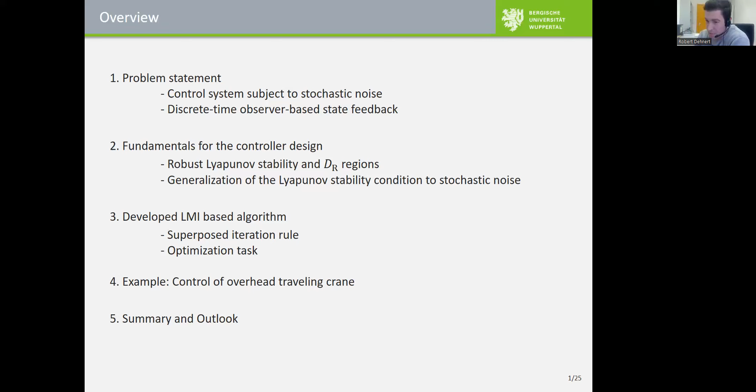I'll give a short overview of this talk. After the problem statement with the control system subject to stochastic noise and the considered observer-based state feedback controller, we come to the fundamentals of the design procedure. This includes the Lyapunov-based stability condition with the DR region concept, and its generalization to the stochastic case. The main part of this talk will be the developed LMI-based algorithm, which uses a superposed iteration rule to linearize the nonlinear matrix inequalities and to design an observer-based state feedback controller that reduces the influence of noise on the closed loop. LMI-based optimization will be presented, and the results will be evaluated by an example using a nonlinear model of an overhead crane. Finally, there is a short conclusion and an outlook.

So we come to the problem statement. Usually the controller is implemented on a digital computer, so discrete time systems are considered in this study. In this block structure, we can see the used simulation setup. The system to be controlled is a nonlinear continuous time system, and we have DA and AD converters such that the controller operates in discrete time.

We have some disturbances which affect the system. The disturbance inputs are stochastically independent, standard, normally distributed actuator noise, process noise, and sensor noise. The disturbance input matrices contain the corresponding standard deviations. Since we cannot measure all the states of the system, for control only the outputs are available. The Luenberger-like observer with gain H should be tuned such that noise is suppressed efficiently, so that we can use the estimated states for the control. The controller should have a specific gain K in order to provide a desired system behavior.

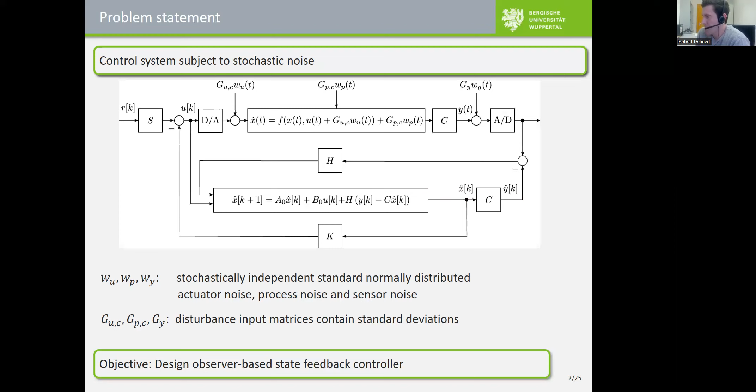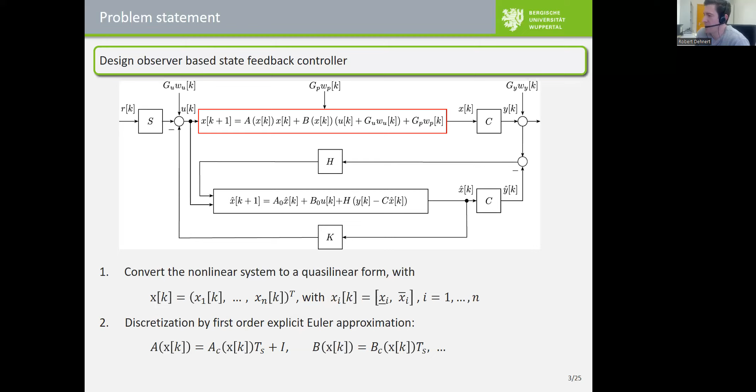So we want to control the nonlinear continuous time system by the shown linear discrete time control structure. In a first step, we convert the nonlinear system into a quasi-linear representation for this design procedure. In general, this representation is not unique, and we assume that each state is bounded by a compact interval. Then the state-dependent time-variant matrices, A and B, can be mapped by a convex set in the proposed design method. In a second step, the system is discretized, and to avoid problems with the existing nonlinearities, we have used the first order explicit Euler approximation.

This Luenberger-like observer-based state feedback structure can be described by an augmented state space representation, which depends on the unknown gain matrices K and H of the controller and observer. The inputs of the augmented state space representation are this vector V, which includes the actuator, process, and measurement noise. The basic idea is to represent this observer-based state feedback through a structured state feedback of an extended state space representation, so we can use a Lyapunov-based state feedback design method.

The states of the augmented state space representation are the states of the system and the observer errors. Note that due to the nonlinearities in the system, the separation principle is not valid, which means that the controller and observer gains can influence each other's stability. This is obvious since the corresponding block in this matrix is different from zero, and it becomes zero only when the differences between the system and the observer are zero.

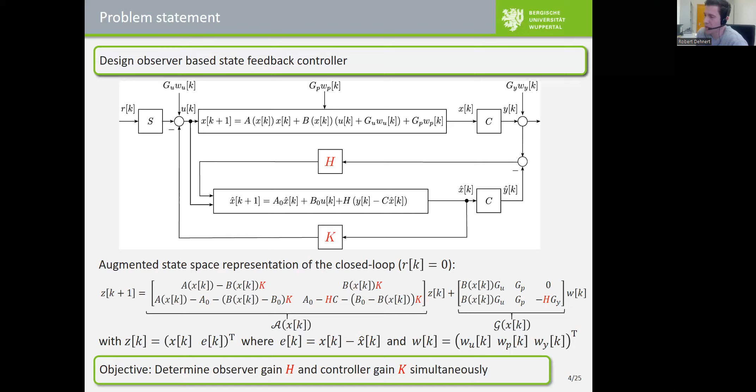Consequently, simultaneous design of the observer and controller is necessary in this case. For this, the variables to be determined simultaneously are the observer gain H and the controller gain K, marked here in red. To realize this aim, an iterative LMI approach is presented in the following.

Therefore, we consider again the quasi-linear system with the matrices A and G, where the states are bounded by known limits. The idea is that we understand these matrices A and G as polytopic uncertainty representations. If we are able to specify these vertices, AV and GV, we can build a convex hull for those state-dependent matrices. Then we can be sure that every combination of all admissible states is inside a convex hull. For proof of stability of the quasi-linear system in its given bounds, we only have to check the vertices, AV and GV, in the Lyapunov approach.

So let us consider this simple unstable example with two states and one state in the matrix A. The system matrix is linear and quadratically dependent on the state x2, whereby the state x2 can have values between minus 0.2 and 0.8. The convex inclusion of the state-dependent system matrix can be done here, for example, by the convex combination of those four vertices shown here in blue. These matrices are calculated by introducing an independent parameter gamma.

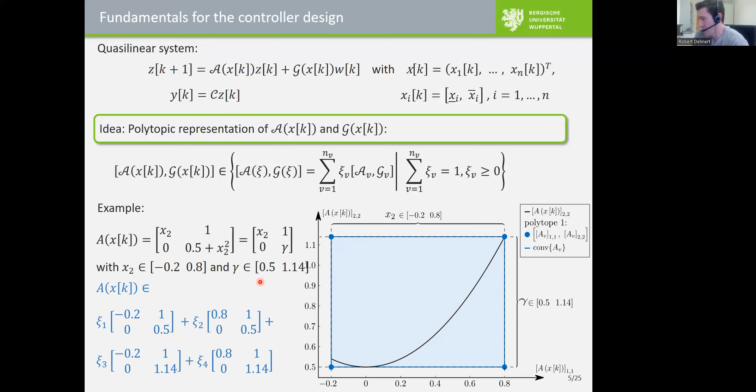This parameter is shown here for the first nonlinear matrix entry of A, whose elements or limits were calculated from the minimum and maximum function values of the nonlinear function on its interval. We can see in the figure that admissible function values, the black line, are inside this convex polytopic representation. However, here are some vertices, this one and this one, which have unphysical properties. This over-approximation caused by the convex enclosure is also typical, not unique.

In the sense of the later shown optimization, this can lead to problems since both the quasi-linear form and the convex hull are fixed before optimizing the parameters. In general, this can lead to conservative optimization results. Therefore, we will investigate such problems in a follow-up work. However, the solution of this problem is not subject to this talk.

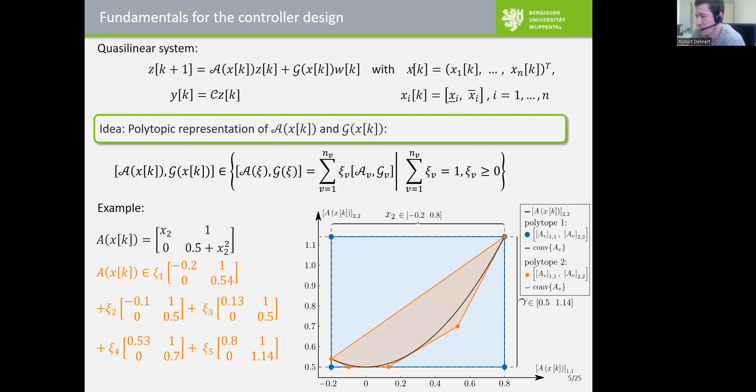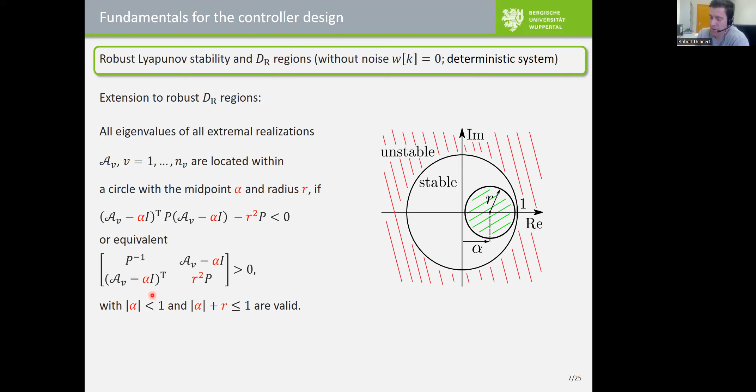Previously shown, it was assumed that there is an absence of noise, which means that the disturbance input w was equal to 0. If noise affects the system, it is necessary to expand the stability condition.

It follows here the Itô differential operator. This is shown in the green box, and this operator can be understood as a generalization of the Lyapunov condition to the stochastic case.

I don't want to derive this operator here. You can read it in our paper, but I can say that this operator is derivable from the expectation value of the Lyapunov increment under some assumptions.

We can see that if the noise is equal to 0, then this part of the differential operator is also 0. And then the differential operator is equal to the Lyapunov condition for the deterministic system here.

So we have to minimize the influence of the noise to the system. This can be done by minimizing the trace of this matrix here. The matrix GV contains the observer gains H. Therefore we get decreasing observer gains by minimizing the trace of this matrix, and this improves the noise reduction of the closed loop.

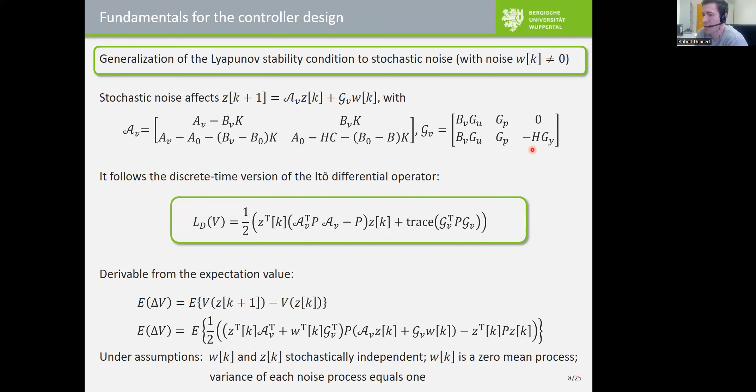Now the question is how we can do that with an LMI approach. To explain, I switch back to the stability condition of the deterministic system, and I show at first a comparison of the continuous time version of the Lyapunov condition to the discrete time one. This also directly answers the question why we develop discrete time controllers.

For this, we consider the well-known state feedback control law, and we can transform the discrete time Lyapunov condition to an equivalent form by the use of the Schur complement. Then in both cases, discrete time and continuous time, the robustly stabilizing state feedback controller can be calculated in a similar way. This is done by a matrix congruence transformation and change of variables, and the controller is then given by K equal to N multiplied by the inverse of Q.

In discrete time, another possibility is available to transform the stability condition to LMIs. This option is in general less conservative than the first one, and can also be referred to as the state-of-the-art method for discrete time systems.

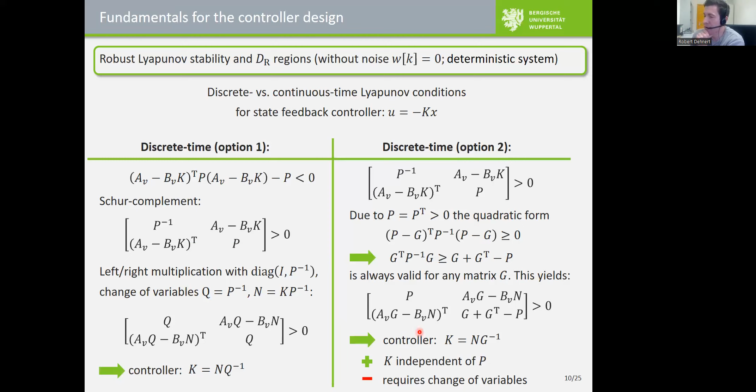For this, we consider again the stability condition and this quadratic form here. If we replace this matrix G by a symmetric and positive definite matrix P hat, and multiply this inequality by the inverse of P hat from the left and right, we obtain a linearization for the inverse of P.

For a constant P hat, this linearization depends linearly on the decision variable P. In the following, we denote this linearization as L. Then this stability condition here is always satisfied if these LMIs are satisfied.

We can see that the system matrix of the closed loop AV remains in its original form in these LMIs here. This means that the method is applicable if the control structure is changed, so that PID controllers or combined control structures can be designed with these LMIs without changing the LMI conditions.

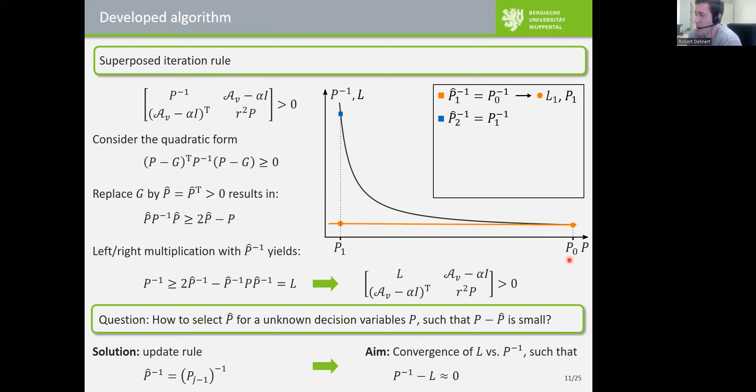The supporting point of the second iteration is then calculated with the help of P1, marked here with a blue square. After solving the LMIs in the second iteration, P2 and the corresponding linearization L2 are available, where L2 is again on the tangent of the supporting point of the last iteration.

If this process is continued successfully, then we can see that the linearization L converges to the inverse of P from below here.

And through this iteration rule, a kind of Newton method is obtained, which is used to find the zero of the matrix difference between the inverse of P and the linearization L. And here the problem is that the initial value P0 can be ill-conditioned. This means that the LMI condition might not be fulfilled in the first iteration.

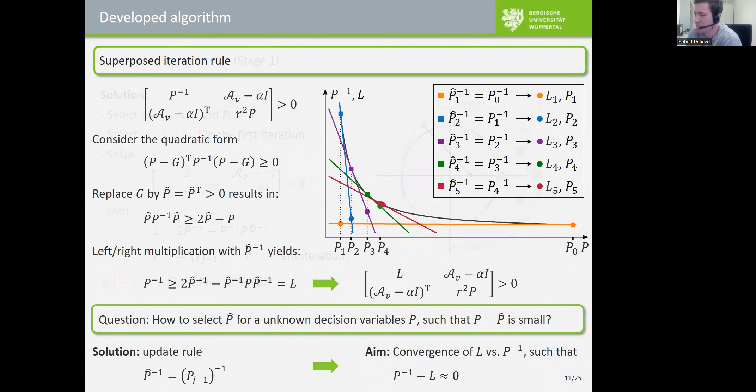A possible solution is given by the parameters alpha and r, which represent the midpoint and the radius of a circle in the complex plane. In the first iteration of the superposed iteration rule, the absolute value of alpha plus the radius is chosen to be larger than 1, so that there can be eigenvalues outside the unit circle.

This increases the admissible solution set such that the expanded LMI conditions are satisfied with a given initial P0. Then the algorithm starts to iterate. We reduce R in each iteration and update P hat by the update rule.

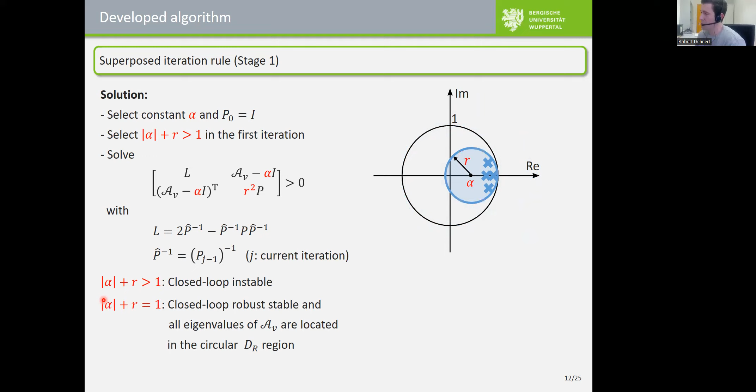By successfully reducing the radius, the admissible solution set decreases, such that for alpha plus R equal to 1, the robust stability of the closed loop is ensured, and all eigenvalues of the extremal realizations of the closed loop are located in the blue circle here.

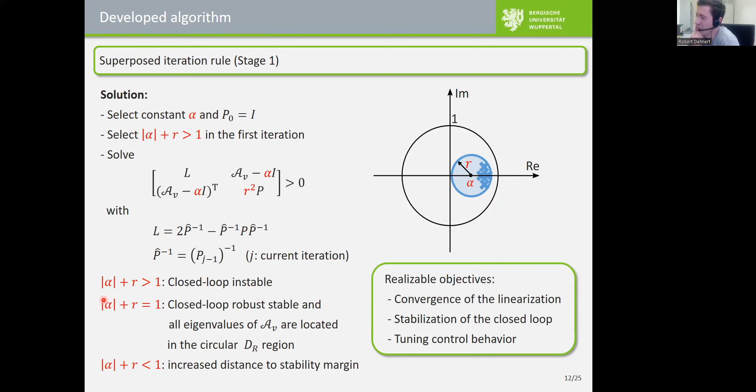By further iterating and decreasing the radius, increased distance to the stability bound can be adjusted. Thus, three objectives can be realized by using the superposed iteration rule, which is called here the first stage of the algorithm: the convergence of the linearization, the stabilizing of the closed loop, and the tuning of the control behavior.

In the next stage, we expand this superposed iteration rule by a cost function to be minimized. Therefore, we have to consider the differential operator again. If stochastic noise affects the closed loop, this operator is maybe non-negative in a neighborhood near the origin. However, to prove the stability, it must be negative.

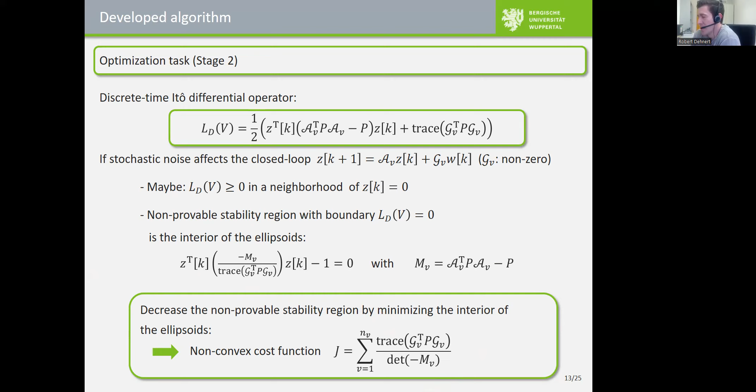To convexify this cost function, we have to consider the cost function subject to the necessary LMI conditions based on the iterative linearization approach. If we consider the numerator, we can see that this matrix here is nonlinear dependent on the decision variables, because the matrix GV contains the observer gain H.

Therefore, we have to replace this matrix here by an additional decision variable n, under this new constraint here. We can say that n is an upper bound of this matrix. This constraint can be reformulated by the Schur complement and by inserting our linearization here for the inverse of P, resulting in two LMI conditions.

And so we have to consider the denominator of the cost function. If we inherit mv from the last iteration, which means that m hat v is a constant, then the denominator of the cost function is also a constant. Thus, the cost function is here convex.

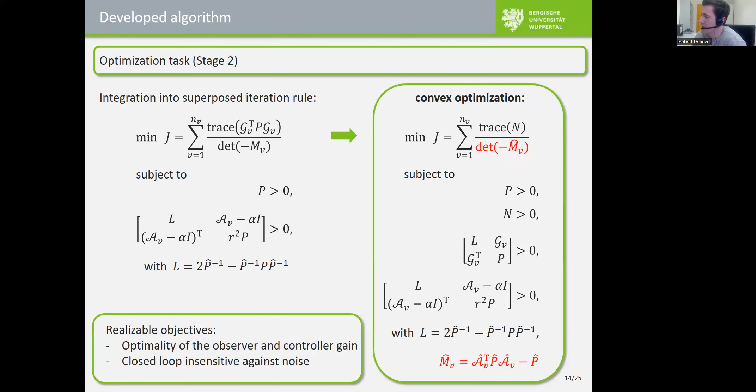This yields a convex iterative optimization approach to optimize the observer and controller gains in such a way that the closed loop becomes insensitive against noise.

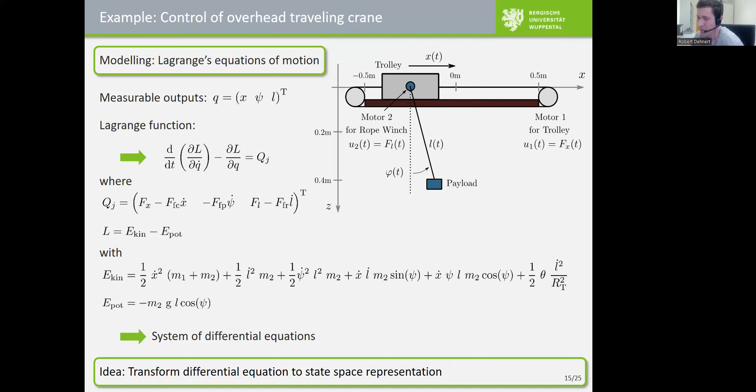Then the differential equations can be derived by a Lagrange approach, where the Lagrange function is defined as the difference of kinetic and potential energy. I won't show the resulting differential equation at this point. You can trust me, you don't want to see these equations here.

However, we can simplify these models such that they can be expressed in a structured form. In the first step, the simplifications for small angles are used here. In my opinion, these simplifications are not significant restrictions, since we don't get any large angles due to the later control.

Then we can introduce a state vector and transform the differential equations to the state space representation. In a last step, we can bring this state space representation to a quasi-linear form with the state-dependent matrices A and B, where there are some nonlinear functions inside and some constants denoted as P.

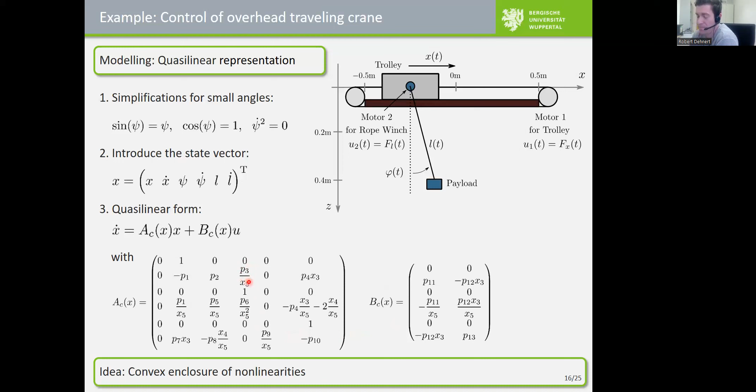Now the idea is that each state is restricted by an upper and lower bound. This is not a real constraint, since all real systems are constrained. For example, the trolley can move within a range of 1 meter here. Now we introduce for each nonlinear function in the matrix entries an independent parameter delta, and this can be done by the use of interval arithmetics. The independent parameters are also restricted, and therefore also all matrix entries. Due to the 5 independent parameters delta, we obtain 32 vertices for the LMI approach in this case.

In the last step, we compute the discrete-time version of these matrices, and for this we use the first order Euler approximation. So we have here a discrete-time polytopic representation of a nonlinear system. With the help of this polytopic model, we have calculated the controller and observer gain with our iterative LMI approach.

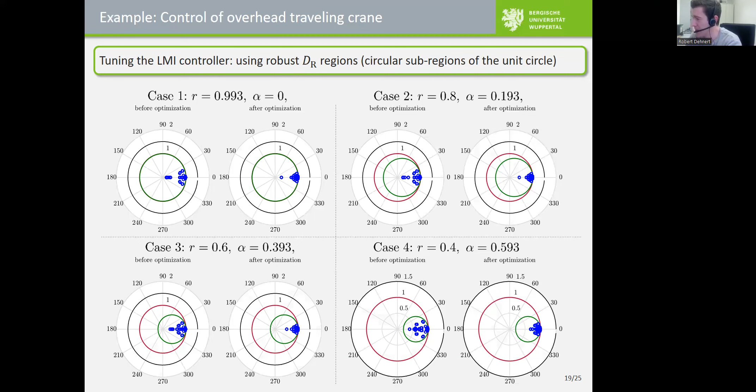From case 1 to case 4, the radii of the circle decrease, while the distance to the stability boundary is always constant. In the following, we consider the second case, where the radius is equal to 0.8. With these parameters, we have realized a similar control behavior compared to the LQG controller.

I would like to show that the new approach is less sensitive to noise with a comparable control behavior.

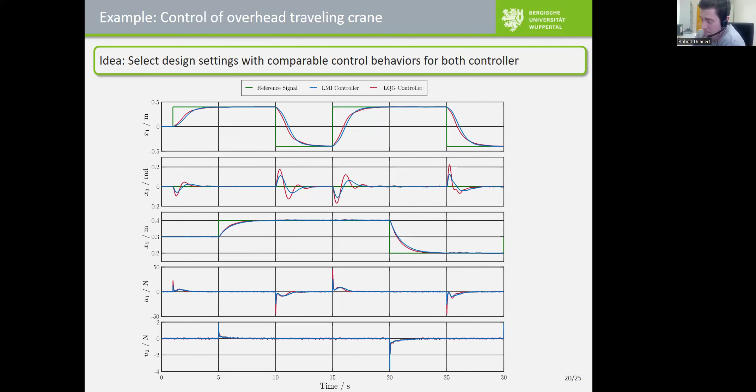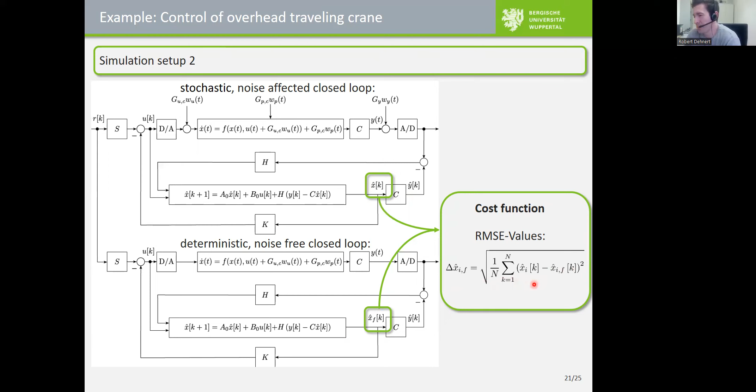A more significant improvement is reached in the estimates of the non-measurable states. Here the improvement in noise reduction is up to 65%. This comparison shows the impact of the previously shown optimization task.

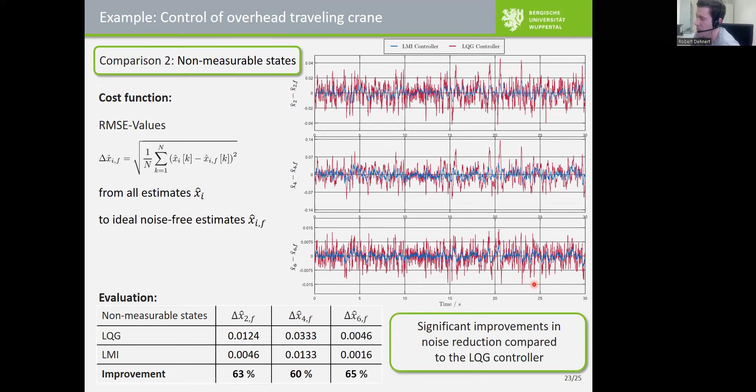Thus it can be found here that with the same control structure and a similar control behavior, the new approach is less sensitive to noise compared to the LQG controller.

And so I come to my conclusion. I've presented an iterative LMI-based design method to design an observer-based state feedback controller subject to stochastic noise. The advantage of the method is that the presented design method can provide control parameters which improve the noise reduction of the closed loop.

In addition to the control parameters, the method provides a proof of stability for the deterministic part of the nonlinear closed loop. We can take into account bounded uncertainties and nonlinearities by polytopic representation. Moreover, the method enables us to parameterize various control structures with identical LMI conditions.

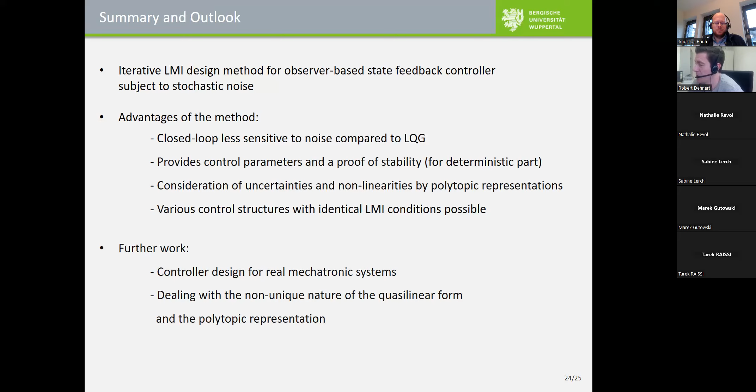In future works, I will focus more on controllers for real applications. For the shown overhead crane, we have to expand our model with some nonlinear friction components for this. I want to deal with the non-unique nature of the quasi-linear form and the polytopic representation in the optimization to reduce the conservatism further.

So I'm finished, and thank you for your attention. I'm looking forward to answering your questions and remarks.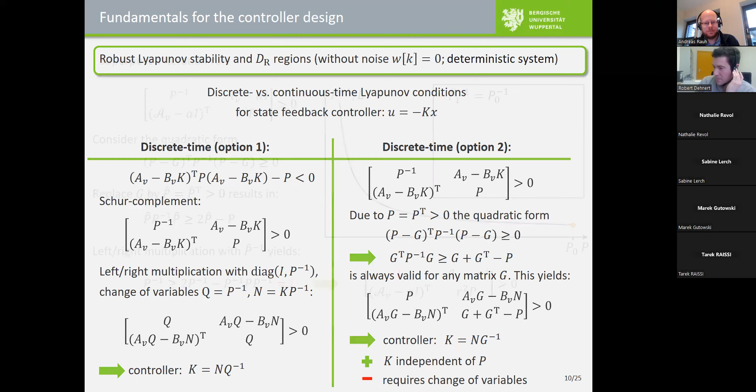Okay, now I'm slightly unfair. But the thing is, I just have a remark for, let's say, also future work. The thing that Robert mentioned, I think it was on slide 17. Maybe you could go back.

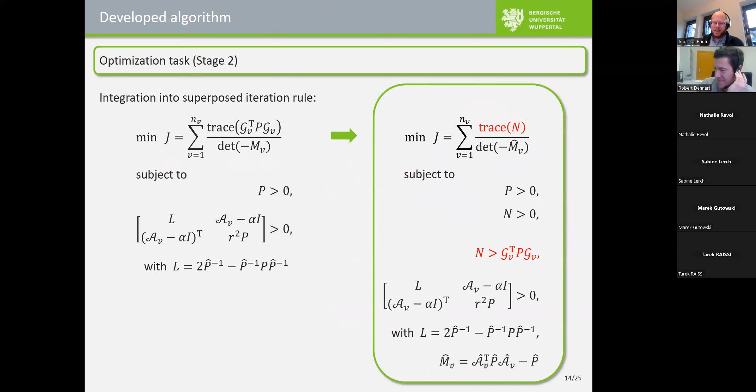For example, one of the reasons to do so would be if you're doing just a naive splitting of such product terms, you may end up with a representation that is either not controllable or not observable, or virtually not controllable or not observable, because this is just too stupid a factorization. Those are things that one could circumvent easily by optimizing further also the splitting up into the quasi-linear form.

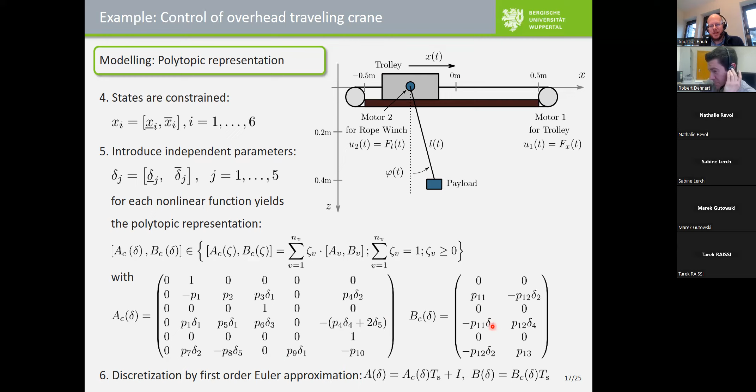That's just one remark concerning works that we are currently also doing together with Robert and his team. Yes, I think that's a very good idea to deal with it, to combine both. Yes, and the other thing is, if you go to the next slide, to the block diagram...

Yes, you can bring A0 and B0 to the optimization directly. There's no multiplication between other decision variables, yes.